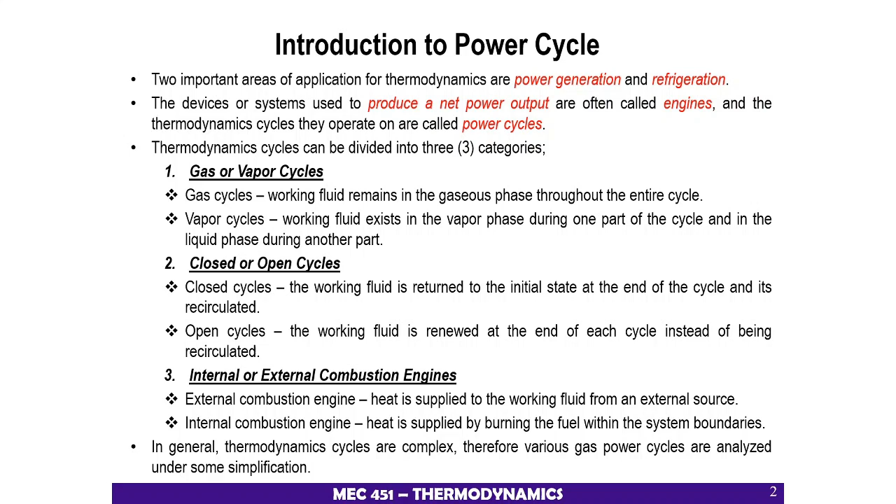This is the hierarchy for power cycles. First we have heat engines, divided into two: external combustion and internal combustion. External combustion includes the steam engine, which we'll discuss in Chapter 6, the next chapter. This chapter focuses on internal combustion.

For internal combustion, we have three types: reciprocating, Wankel, and rotary gas turbine. In this chapter we focus on reciprocating engines, which have two types: CI and SI.

SI stands for spark ignition, CI stands for compression ignition engine. Compression ignition normally applies to diesel engines, while spark ignition normally applies to petrol engines. CI engines have two types, 2-stroke and 4-stroke, and the same applies to SI engines. In your syllabus we focus on CI and SI — compression ignition and spark ignition.

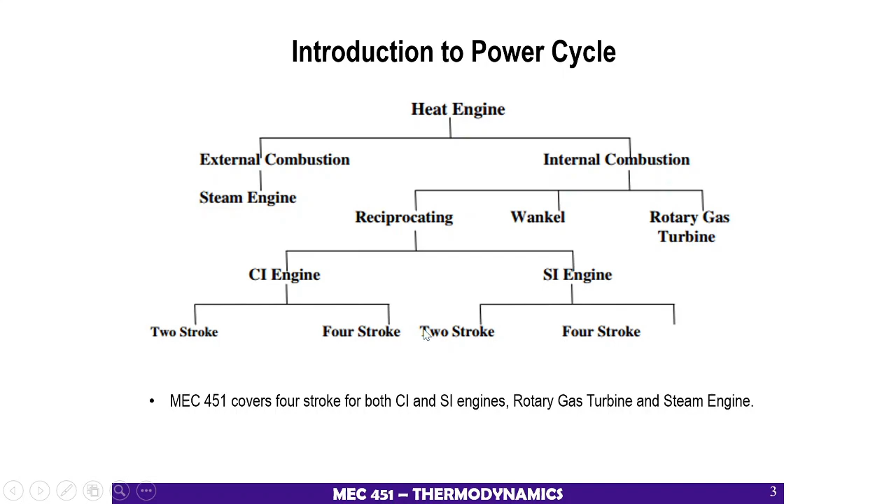Basic considerations in the analysis of power cycles: the cycles encountered in actual devices are difficult to analyze because of complicating effects such as friction, and the absence of sufficient time for establishment of equilibrium during the cycle. Because the cycle is very fast, the device used to record it is not efficient. So to make an analytical study of a cycle feasible, we have to keep the complexities at a manageable level and utilize some idealizations.

This is called modeling the cycle. If a cycle resembles the actual cycle closely but is made up totally of internally reversible processes, it is called an ideal cycle. Ideal cycles are internally reversible, but unlike the Carnot cycle, they are not necessarily externally reversible. Therefore, the thermal efficiency of an ideal cycle is generally less than that of a totally reversible cycle operating between the same temperature limits. However, it is still considerably higher than the thermal efficiency of an actual cycle because of the idealization utilized. The cycles discussed in this chapter are somewhat idealized, but still retain the general characteristics of the actual cycle they represent.

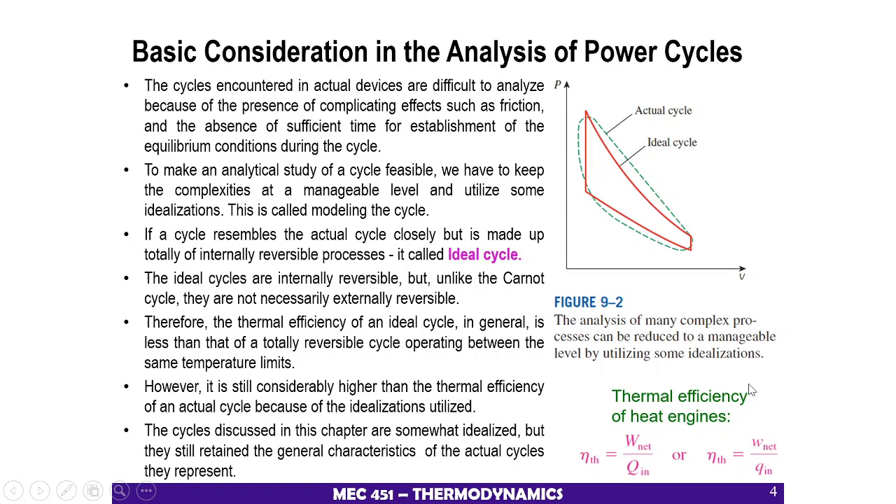The idealizations and simplifications in the analysis of power cycles can be summarized as follows: the cycle does not involve any friction — we assume it's frictionless. Therefore, the working fluid does not experience any pressure drop as it flows through pipes or devices such as heat exchangers. All expansion and compression processes take place in a quasi-equilibrium manner.

Normally in reality it's in a transient condition, but in this consideration we assume it's in the equilibrium condition. Third, the pipes connecting the various components of a system are well insulated, meaning no heat transfer occurs, and the total heat transfer is negligible.

Neglecting the change in kinetic and potential energy of the working fluid is another commonly utilized simplification, due to devices that involve shaft work such as turbines, compressors, and pumps. The kinetic and potential energy terms are usually very small relative to the other terms in the energy equation.

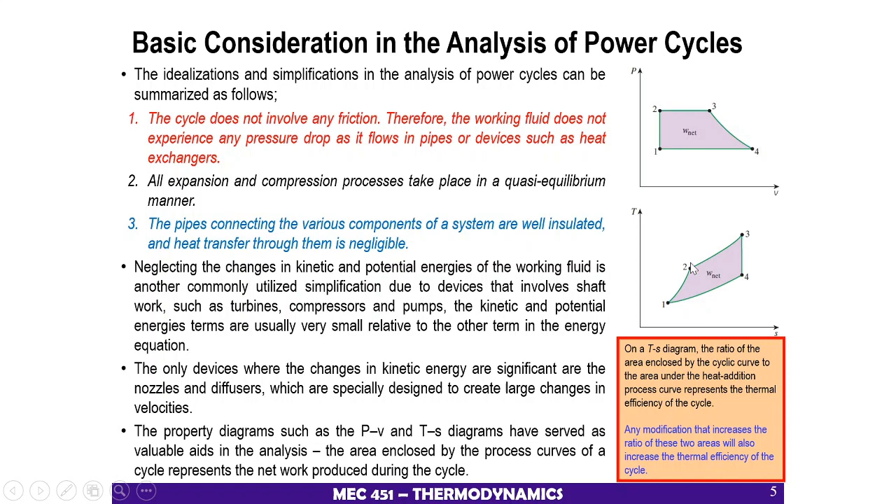Carnot cycle. The Carnot cycle is composed of four totally reversible processes. First, isothermal heat addition. Number 2, isentropic expansion. Number 3, isothermal heat rejection.

And lastly, isentropic compression. For both ideal and actual cycles, thermal efficiency increases with an increase in the average temperature at which heat is supplied to the system, or with a decrease in the average temperature at which heat is rejected from the system. So consider a steady flow Carnot engine.

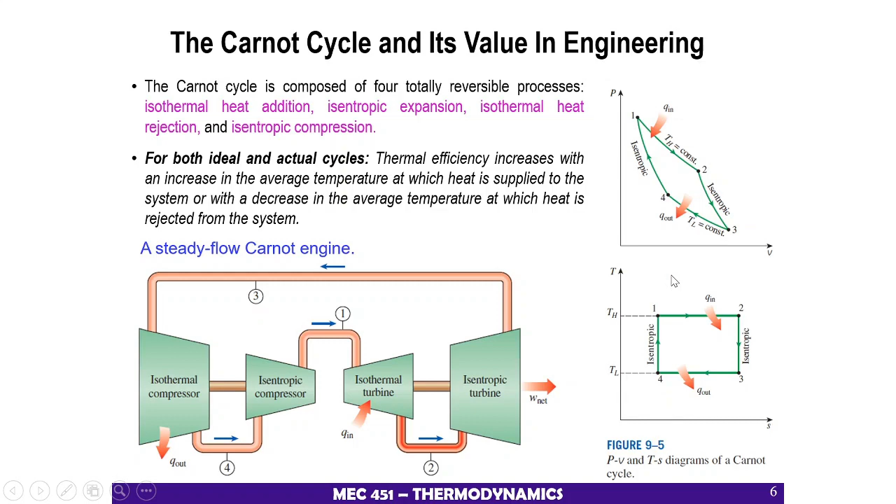So the Carnot cycle was introduced as the most efficient heat engine that operates between two fixed temperatures, T high and T low. The thermal efficiency of the Carnot cycle is given by 1 minus T low divided by T high, the high temperature.

Upon derivation, the performance of a real cycle is often measured in terms of its thermal efficiency. So efficiency is work net divided by Q in.

So work net comes from Q in minus Q out. Substitute Q in minus Q out into the equation for work net. So we have Q in per Q in, which gives us 1, minus Q out per Q in, where this is your Q out.

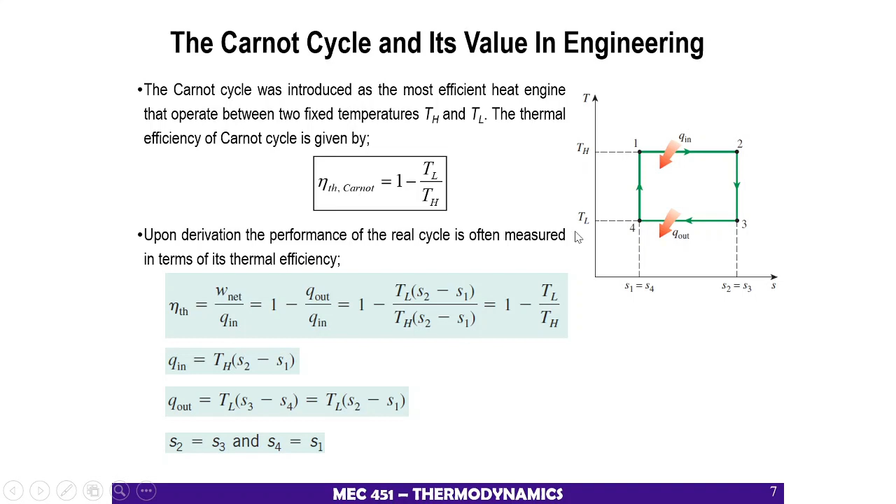As a standard assumption, in power engines, energy or heat is provided by burning fuel within the system boundaries. For example, internal combustion engines, jet engines, and so on. The following assumptions are commonly known as the air standard assumptions.

Firstly, the working fluid is air, which continuously circulates in a closed loop and always behaves as an ideal gas. So we assume that the air is in ideal gas condition. Number 2, all the processes that make up the cycle are internally reversible.

Number 3, the combustion process is replaced by a heat addition process from an external source. Normally this process is heat addition, coming from combustion. So we assume in this section that the heat is being supplied.

Number 4, the exhaust process is replaced by a heat rejection process that restores the working fluid to its initial state. So this exhaust process we assume as heat rejection.

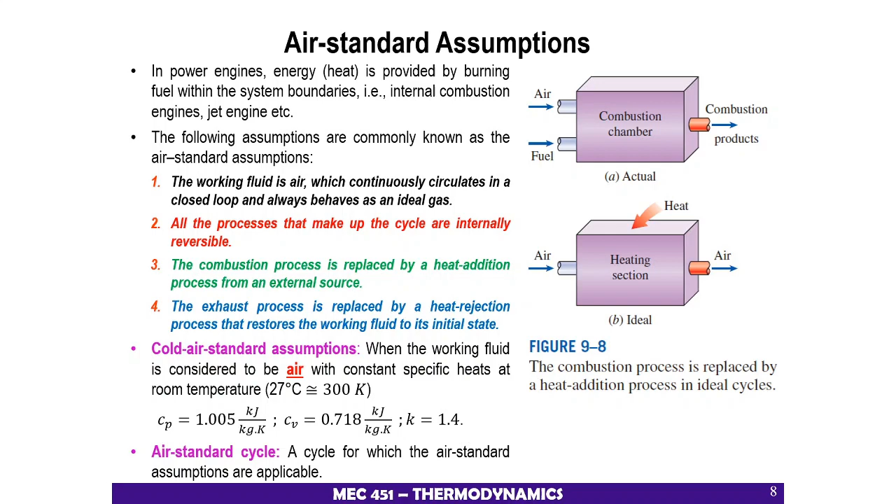Overview of reciprocating engines. A reciprocating engine is an engine that uses one or more pistons in order to convert pressure into rotational motion. They use the reciprocating up and down motion of the piston to translate this energy.

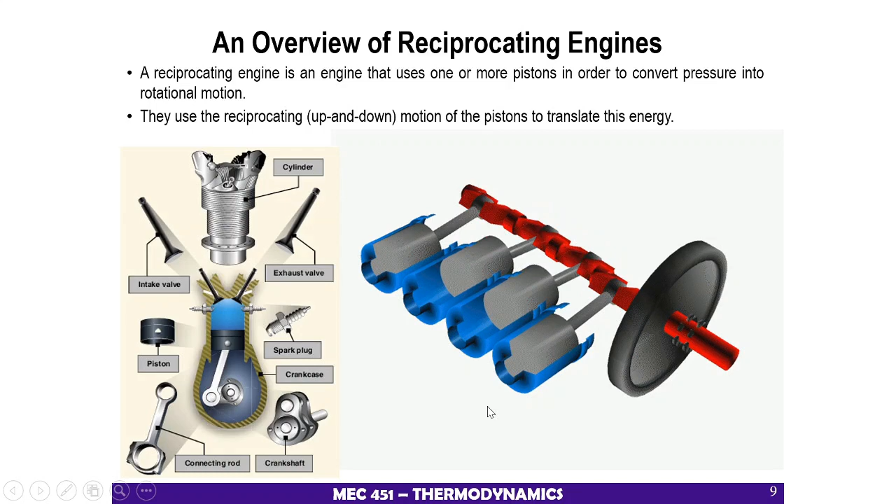Overview of reciprocating engine. The reciprocating engine is one of the most common machines used in a wide variety of applications, from automobiles to aircraft and also to ships. It is actually a piston cylinder device where the piston moves back and forth inside the cylinder to convert heat into work.

The nomenclature for reciprocating engine includes the top dead center, TDC. Top dead center is the position of the piston when it forms the smallest volume in the cylinder, the maximum displacement the piston can go forth. So that we call it TDC. The minimum the piston goes backward, we call it BDC, bottom dead center.

The stroke is the distance of the piston travel in one direction. So from BDC to TDC is your stroke, the length we call it a stroke. The piston movement from TDC to BDC, we call it a stroke.

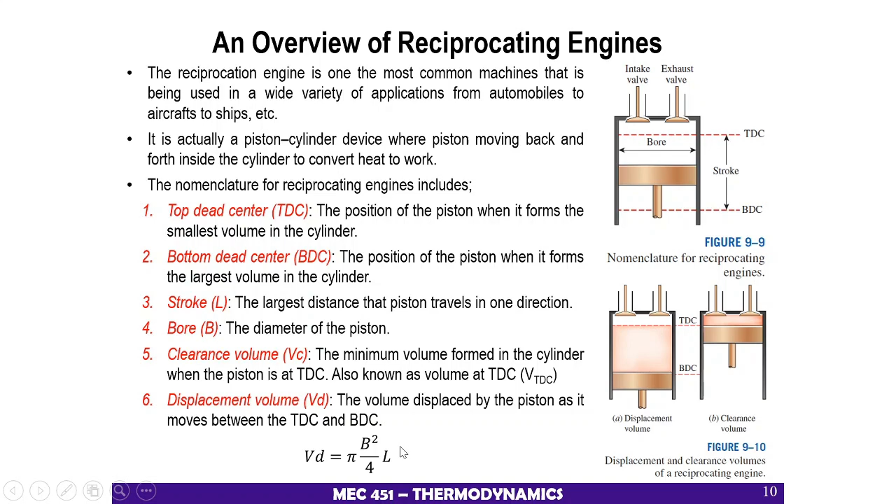Displacement volume is the volume displaced by the piston as it moves between TDC to BDC. So from TDC to BDC is your volume of displacement, VD. Normally we calculate the displacement volume VD using this formula: B is your bore diameter, or piston diameter, or cylinder block diameter, times your length. Length is your stroke. So we have a volume.

Compression ratio is the ratio of maximum to minimum clearance volume in the cylinder. Normally Vmax and Vmin we see in the PV diagram, but in reality Vmax equals Vc plus Vd divided by Vc. I repeat, Vmax normally forms Vd plus Vc divided by Vc. That gives us the compression ratio.

Mean effective pressure, MEP, is a fictitious constant pressure throughout the cycle that, if acted on the piston, would produce the work. An engine with higher MEP will produce a larger net output work. So MEP is your net work divided by Vmax minus Vmin. Vmax and Vmin can be determined from the PV diagram. The mean effective pressure can be used as a parameter to compare the performance of reciprocating engines of equal size. The engine with a larger value of MEP delivers more net work per cycle and thus performs better.

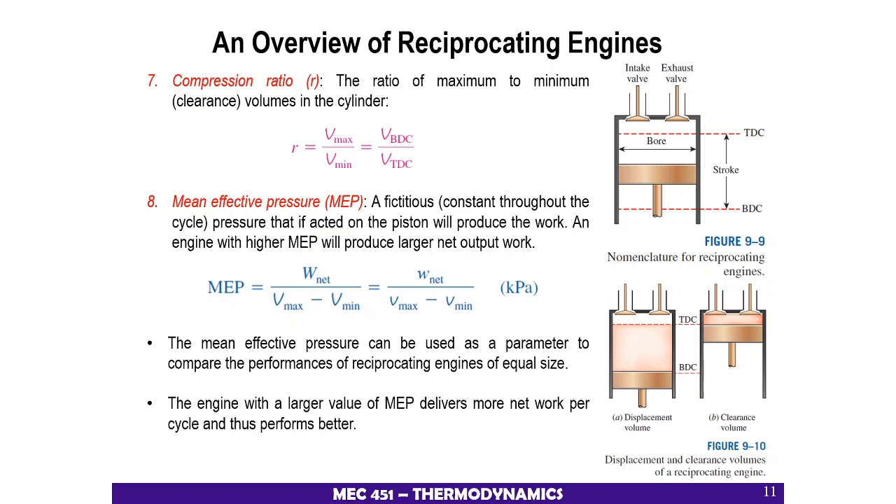Introduction to petrol engine. A petrol engine, also known as gasoline engine in American English, is an internal combustion engine with spark ignition, SI engine, designed to run on petrol or gasoline and similar volatile fuels.

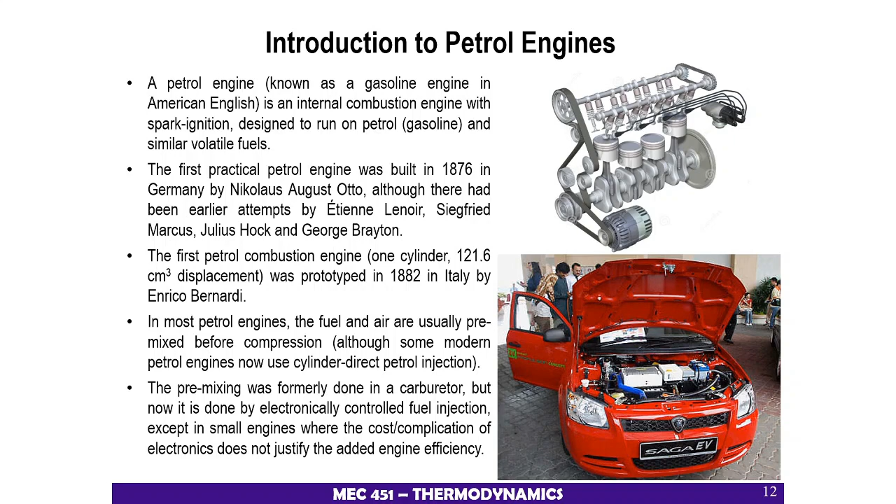In most petrol engines, the fuel and air are usually pre-mixed before compression, although some modern petrol engines now use cylinder direct petrol injection, GDI, gasoline direct injection. The pre-mixing was formerly done in a carburetor, but now it's done by electronically controlled fuel injection, except in small engines where the cost or complication of electronics does not justify the added engine efficiency.

Four-stroke spark ignition engine. A four-stroke engine, also known as four-cycle, is an internal combustion engine in which the piston completes four separate strokes while turning a crankshaft. A stroke refers to the full travel of the piston along the cylinder in either direction.

The four separate strokes are, firstly, intake, also known as induction or intake stroke: the piston begins from TDC, top dead center, and ends at BDC, bottom dead center. Then the compression stroke: this begins at BDC, just at the end of the suction stroke, and ends at TDC. The piston compresses the air-fuel mixture, with both intake and exhaust valves closed during this stage.

Combustion, also known as power or ignition, is the start of the second revolution of the four-stroke cycle. The piston is at TDC at the end of the compression stroke. The compressed air-fuel mixture is ignited by a spark plug, forcefully returning the piston to BDC. This stroke produces mechanical work from the engine to turn the crankshaft.

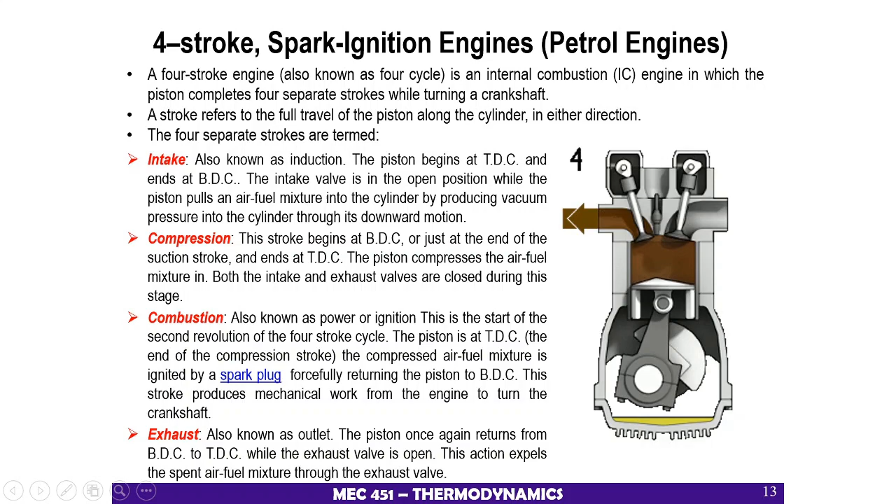So this is the example for a four-stroke engine, 4-cylinder, normally inside the car or a superbike engine. So we have a 4-piston movement. This we call an inline 4, as the pistons are in line.

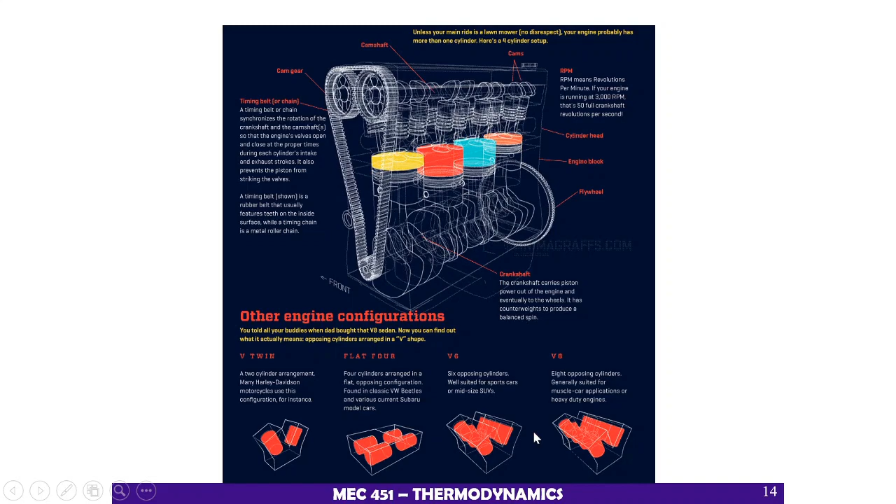Also, we have another engine configuration. We have a V-twin, whereby your piston is V. We also have flat 4, basically normally others may call it a boxer engine. V6, very popular in Malaysia for the Perdana V6 - we have 6 pistons, 3 in a row, and the other row we have 3 pistons. And lastly, V8 engine - 4 pistons in a row, and the other part is 4 pistons.

Alright, 4-stroke spark ignition engine. So this is the intake stroke, whereby your intake valve will open and the air-fuel mixture will go in. So this is the suction made by the piston going down.

As the crankshaft rotates, the mixture will be forced to compress, and the valves are both shut down. At the top, as the piston moves to the top TDC, the maximum condition, the spark plug will fire, which makes the piston move towards the bottom BDC. As the crankshaft rotates after BDC, the piston moves again to the top, and the exhaust valve will open, releasing the mixture of burnt gases into the exhaust.

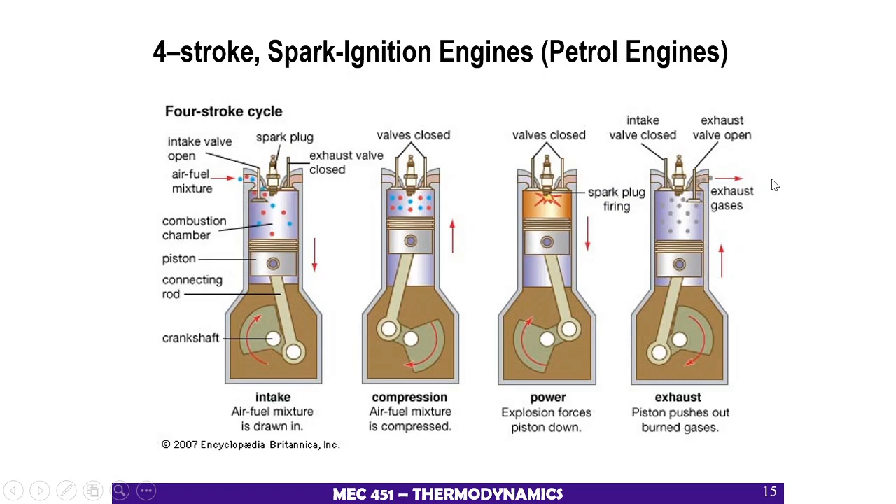So we have the ideal cycle for the spark ignition engine, we call it the Otto cycle. So in this consideration, this is the actual condition. Starting from intake condition, and then compression, and then power starts to ignite via the spark plug, and then expand, the piston moves downwards. In this expansion, the exhaust valve is open, and the gas is released.

So in this actual condition versus the ideal condition, we remove the exhaust and intake condition. We are only concentrating on the isentropic condition, whereby the piston compresses the air inside the combustion chamber. This is the condition whereby the piston moves from BDC to TDC compressing the air-fuel mixture, and then heat is supplied where the spark plug ignites. The pressure goes up, and after the combustion, the piston goes down, moving the crankshaft.

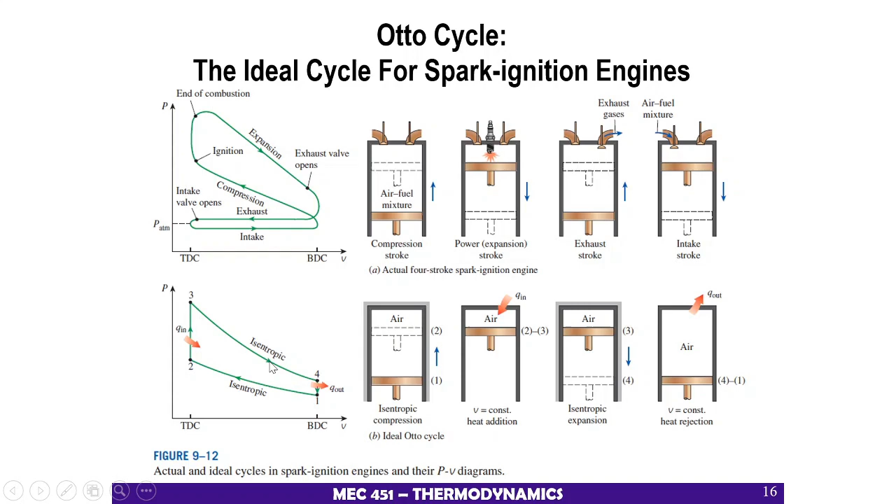So, ideal Otto cycle: air enters the cylinder through the open intake valve at atmospheric pressure during the 0 to 1 process. Normally we leave this out because it's a constant pressure process, so we focus starting from point 1. Point 1 is where the intake valve closes, and it's compressed isentropically to point 2. From point 2, heat is injected, or the combustion process occurs, increasing the pressure inside the combustion chamber. Then it expands isentropically to point 4 as the piston moves down to BDC.

Point 4 is the bottom - this is your TDC, this is your BDC. Then from 4 to 1, heat is rejected to the environment. This process we call heat rejection.

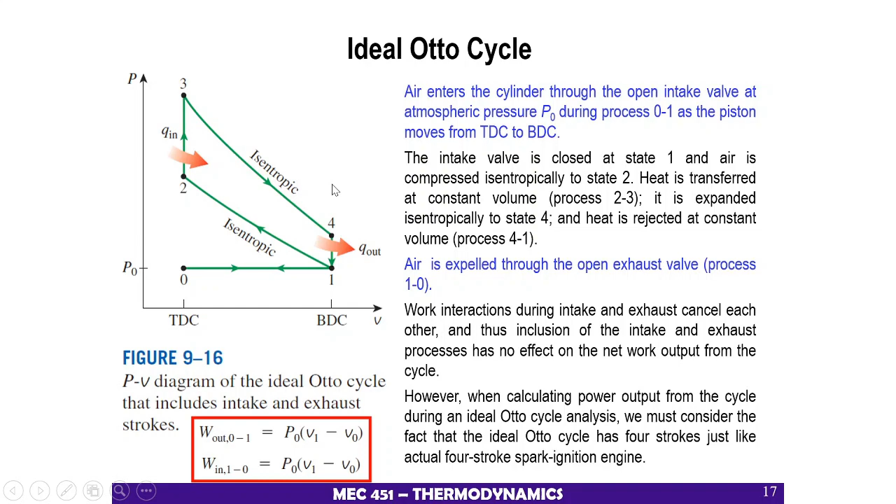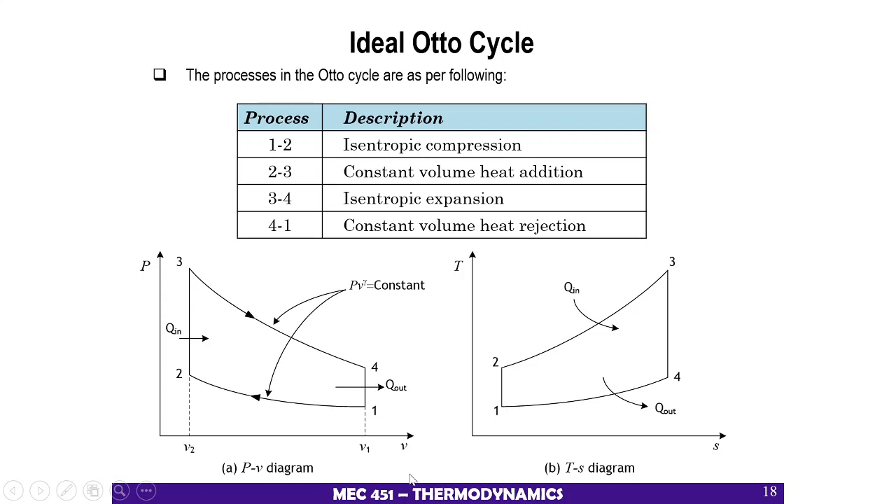So the process of the Otto cycle is as follows: process 1-2, we call isentropic compression. Process 2-3, constant volume heat addition. Process 3-4, isentropic expansion, and process 4-1, constant volume heat rejection. So this is the diagram for the PV diagram, and this is for the TS diagram. Normally for the Otto cycle, we use the PV diagram, as we know the pressure and the volume inside the combustion chamber.

Okay, the related formula. Recall back in chapter 3 and chapter 4, we have determined what is the isentropic process. So process 1-2 is an isentropic compression, and this is your formula related to the process.

So process 2-3 is a constant volume heat addition. We use CV. This is your mass, normally we use m dot. If m dot is in kg per second, the output heat is in watt. But if we only use mass, not mass flow rate, the unit here is only joule. So please be aware of these units.

Process 3-4 is an isentropic expansion, so this is the formula related to the isentropic expansion. This has been introduced to you in chapter 4.

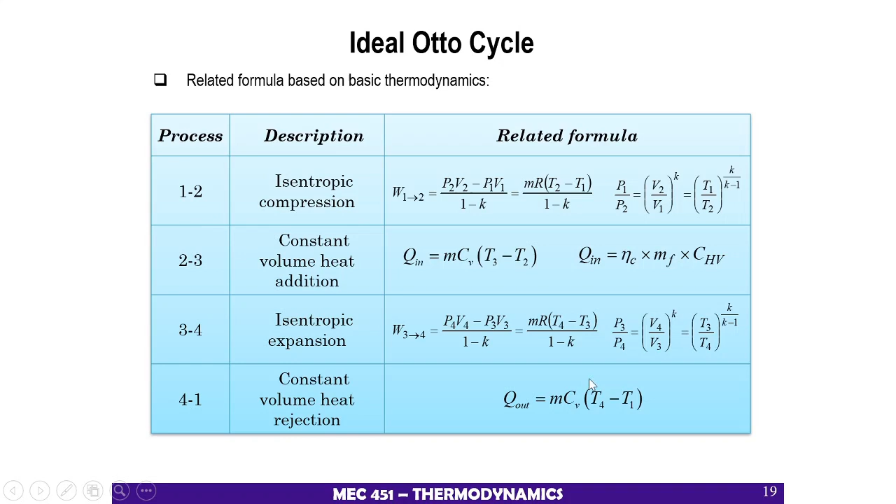For process 4-1, constant volume heat rejection, it is the same as process 2-3, so we get the Q out.

So thermal efficiency of the Otto cycle. In general, the efficiency of a cycle can be determined by using the work net divided by Q in. Work net is Q in minus Q out. So from these equations, we can derive the final equation.

To apply the first law to process 2-3, as the volume is constant, with constant specific heat, we get this condition whereby Q in from the combustion chamber, mass of fuel times calorific value, is the same as mass times heat being injected. So mass times calorific value is the same as mass times constant specific heat at constant volume times the temperature difference. This is the same as this.

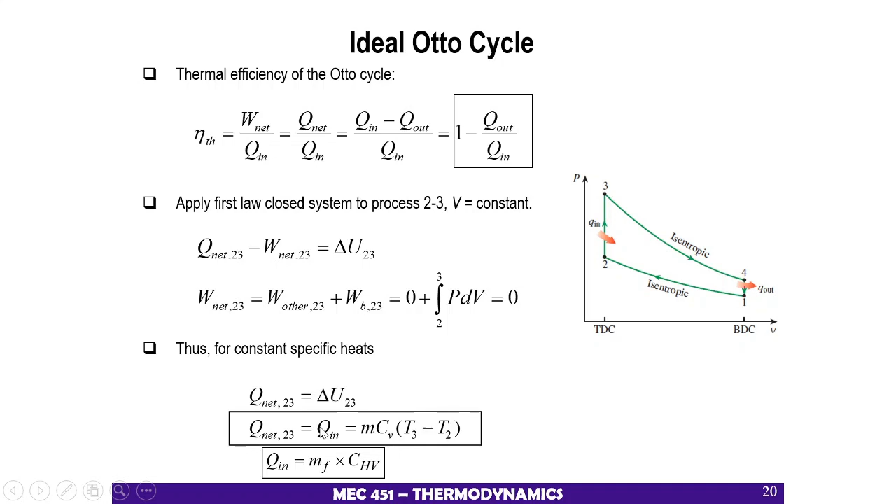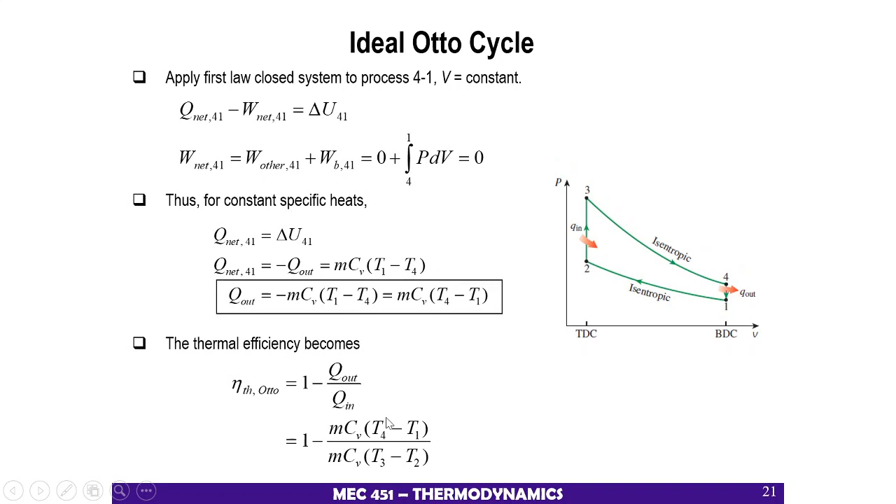For process 4-1, heat being rejected, it is similar. So for the thermal efficiency, we can substitute Q in and Q out inside the thermal efficiency equation. Finally we get this value from the temperature, and we can cancel out terms to get this result.

Rearranging, and since processes 1-2 and 3-4 are isentropic, we can replace the volume with temperature, giving 1 minus T1 over T2. This temperature ratio can be substituted by volume, and this volume ratio is the compression ratio.

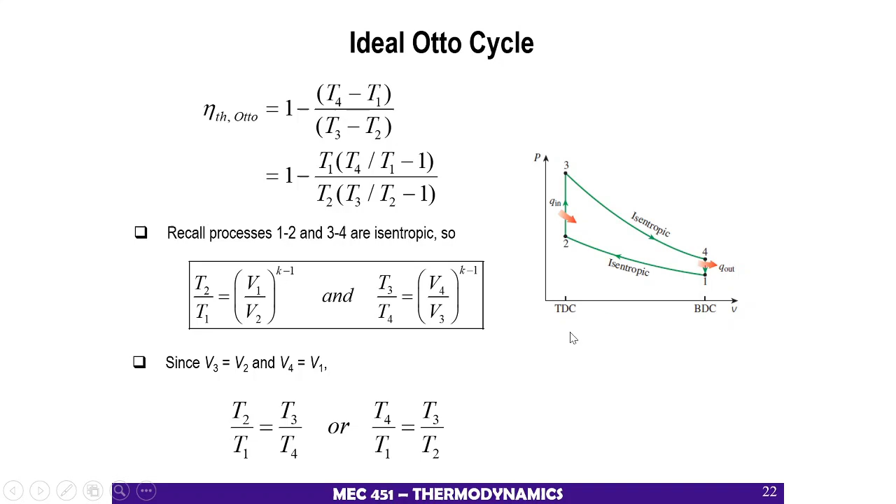BDC and TDC give the specific volume - this is your maximum volume and this is your minimum volume. So if you want to calculate the compression ratio, it's this volume divided by this volume. That's why we have this figure.

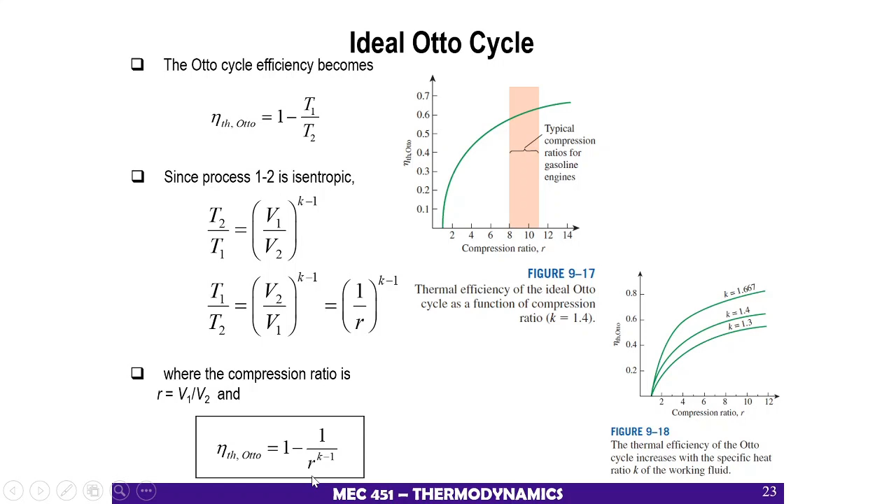So finally, the efficiency of the Otto cycle is 1 minus 1 divided by R to the power of (K minus 1).

Sample problem 5.1: Calculate the ideal air standard cycle efficiency based on the Otto cycle for a petrol engine with a cylinder bore of 50 mm, a stroke of 75 mm, and a clearance volume of 21.3 cubic centimeters.

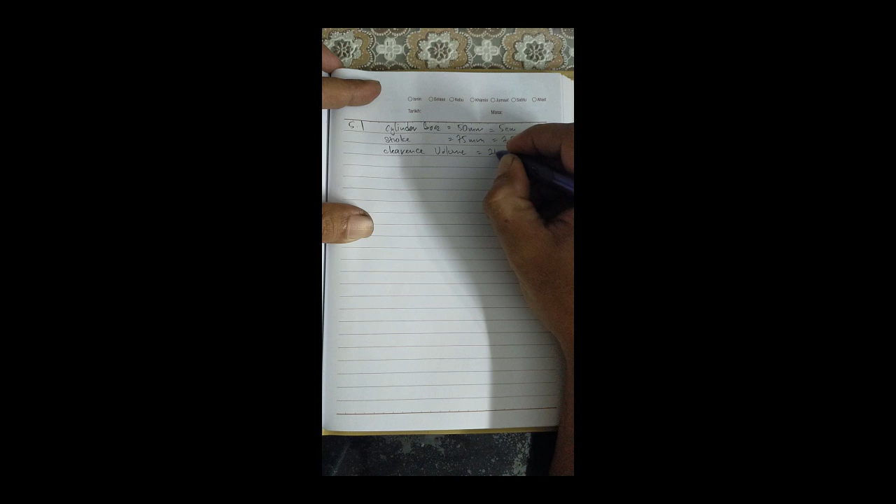Given in the exercise: cylinder bore is 50 mm, which is 5 centimeters, and stroke is 75 mm, which is 7.5 centimeters. Clearance volume is 21.3 cubic centimeters. The question is to find the cycle efficiency.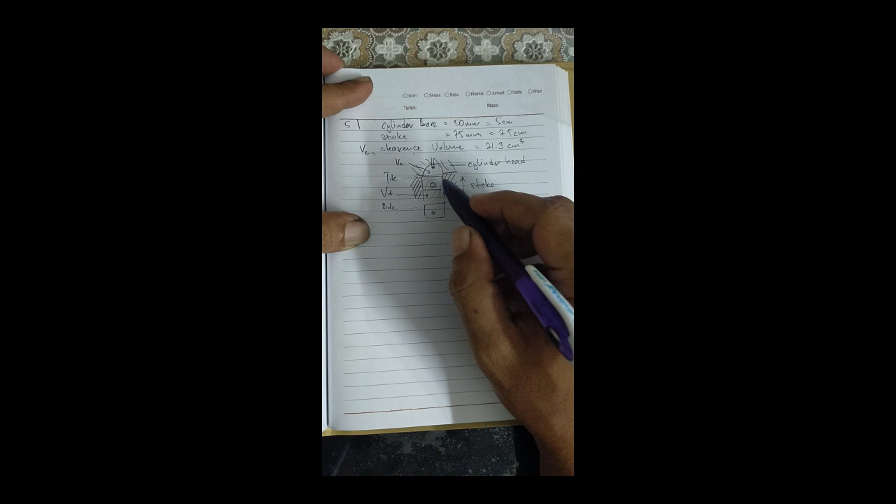From here we can determine this area - this is your VD, volume of displacement inside here. This is what you call a petrol engine, and a petrol engine uses the Otto cycle.

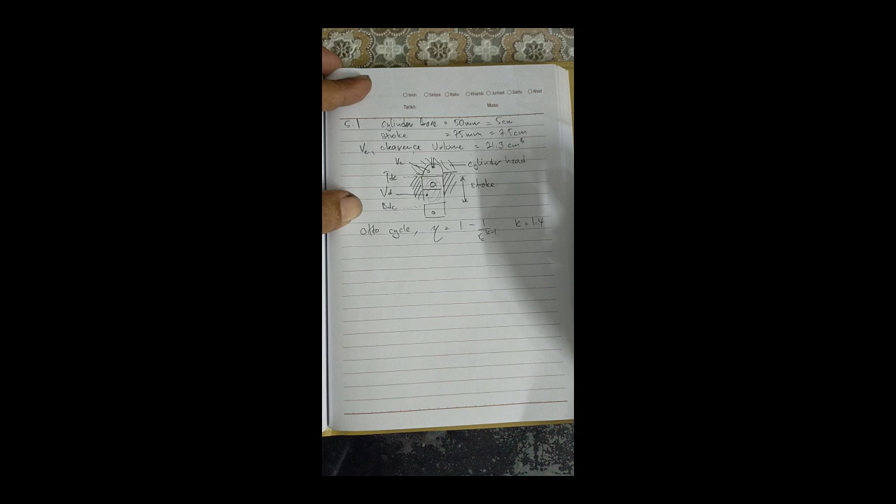So basically the efficiency is 1 minus 1 over R to the power of (K minus 1), where R is the compression ratio, and K is given as 1.4 for adiabatic - we assume no heat is lost here. So in order to determine your compression ratio RC, bear in mind compression ratio is VD plus VC over VC.

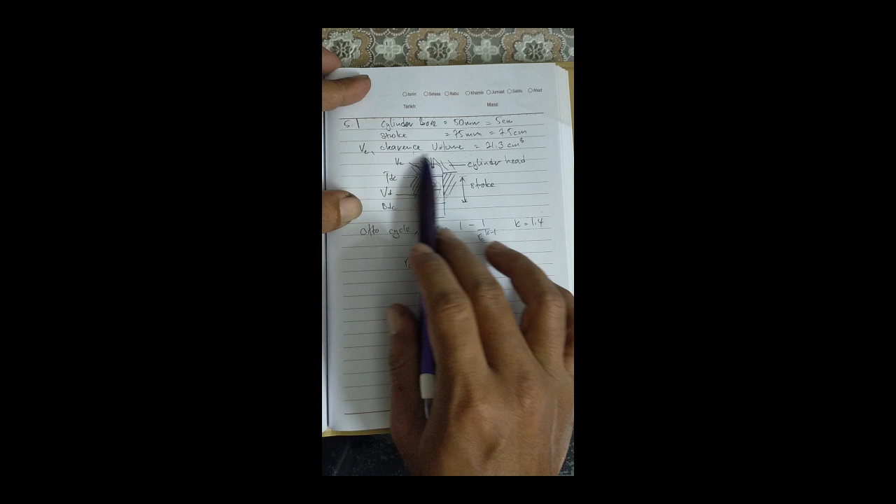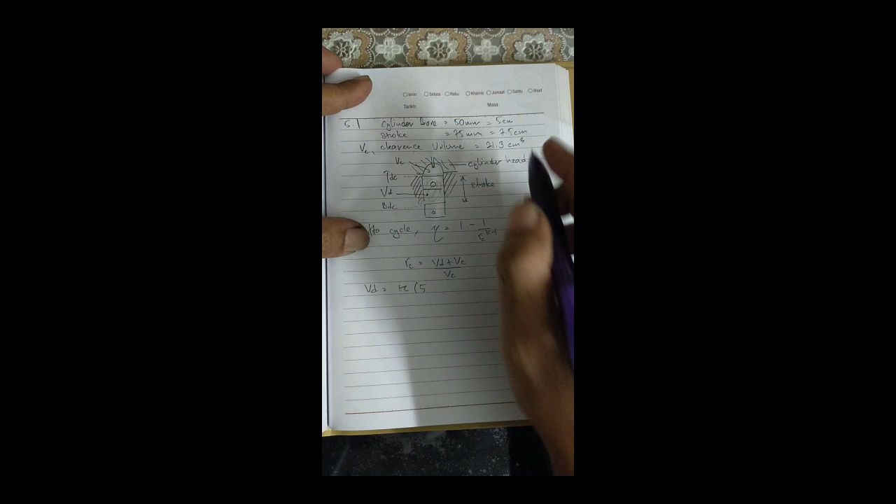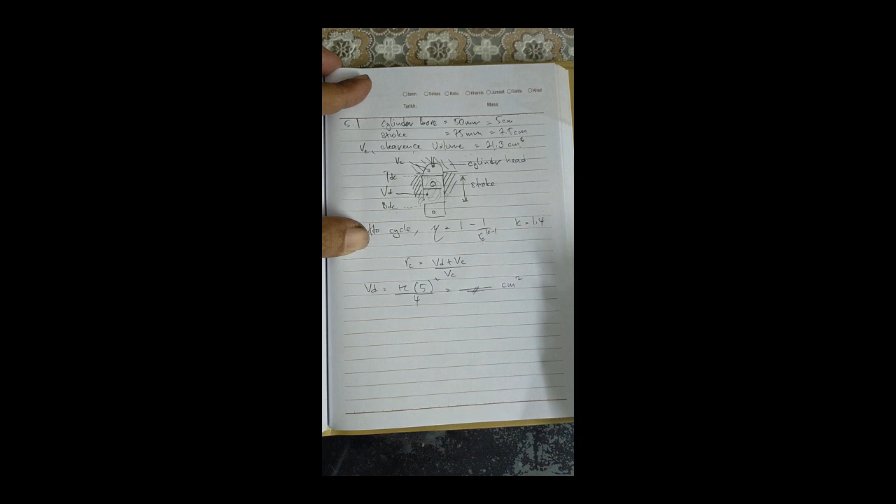This is your VC, given directly. So we need to determine the VD. VD is pi D, the diameter of the cylinder bore, 50 mm, so 5 centimeters, same unit, so basically 5 squared over 4, and by this you can get your VD in centimeters. So we have the area.

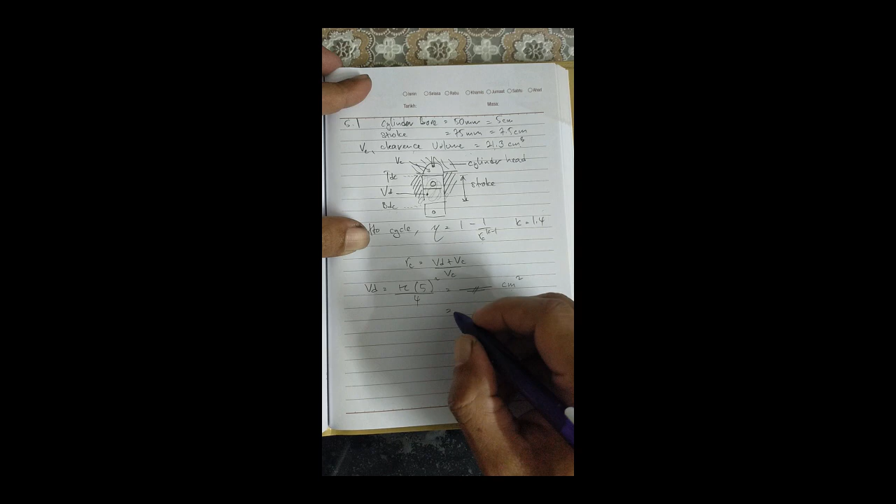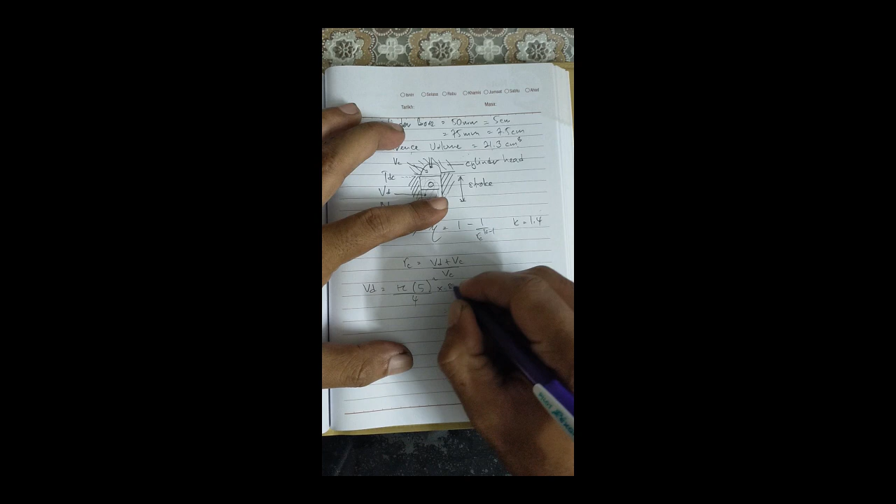This is the area, so we need to multiply it by the stroke, which is 7.5, and we get our answer in cubic centimeters. So we have VD and VC - VC is given directly, VD is calculated here.

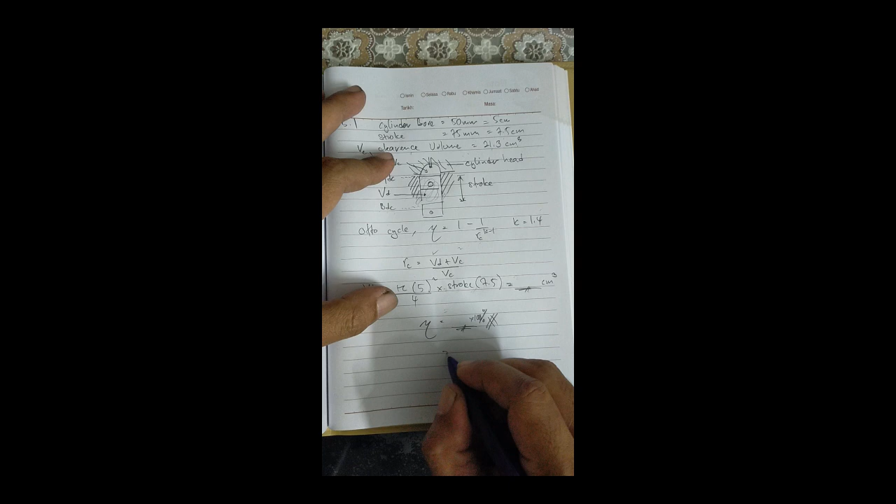So the efficiency, we can get the value, then times 100%, so we can get the answer in percentage. Thank you.